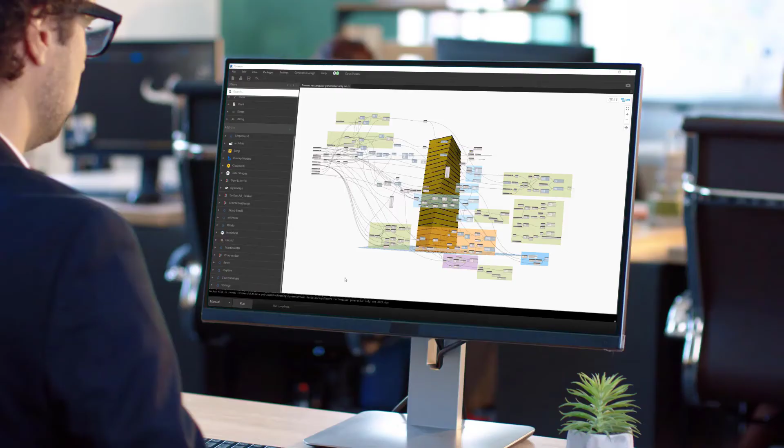The next video is an introduction to this presentation, and hopefully it will give you an insight into our capabilities, future development of BIM management platforms, and new perspectives on construction automation, and a glimpse of possible services in Industry 4.0. Utilizing artificial intelligence algorithms, BEXEL Manager allows you to comprehensively analyze dozens of what-if scenarios.

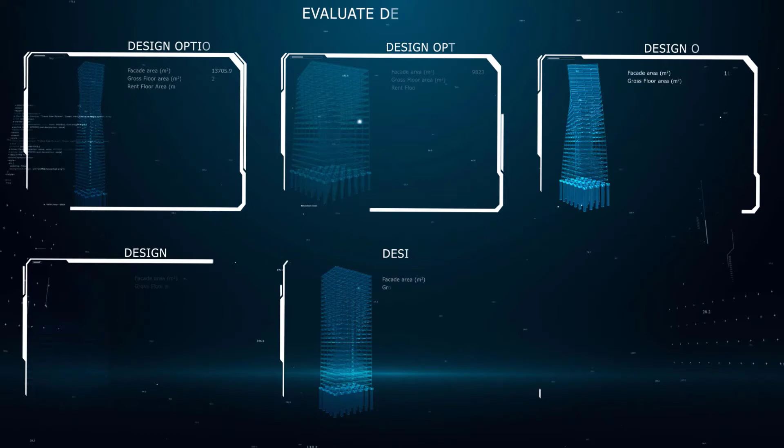Engineers can now study multiple design alternatives in real time, having more freedom for innovation, optimization and higher quality. In synergy with parametric design tools, BEXEL Manager brings the next generation of data-driven decision-making. Our advanced workflow employs smart technology and applies captured experts' logic to generate construction schedules, project budgets, cash flows and resource requirements for each of your preferred solutions.

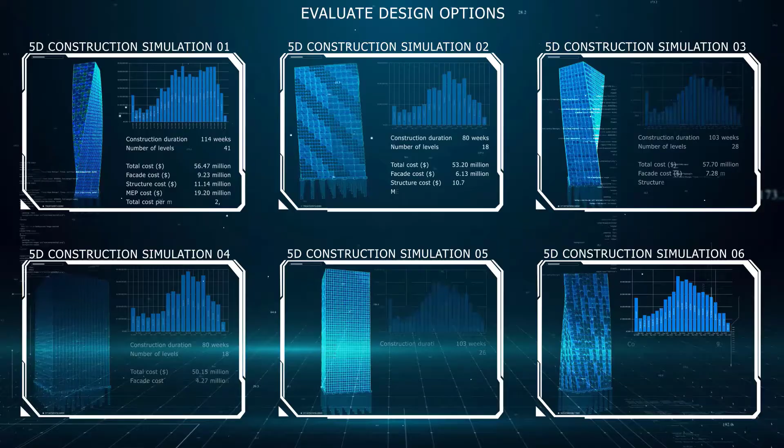This way you can estimate project key design indicators together with required delivery time, cost and cash flow, and choose the best option.

As you may see, the automotive industry already uses parametric design for designing new parts, which are more reliable, economical, more durable, and more efficient, and practically entire industrial design uses it. The plane industry also uses it for designing specific elements such as wings, plane body, and so on. And the boat industry, sport equipment, shoe industry, furniture industry, and even toy industry use it. All have great benefits and have already embraced the potential of parametric and generative design.

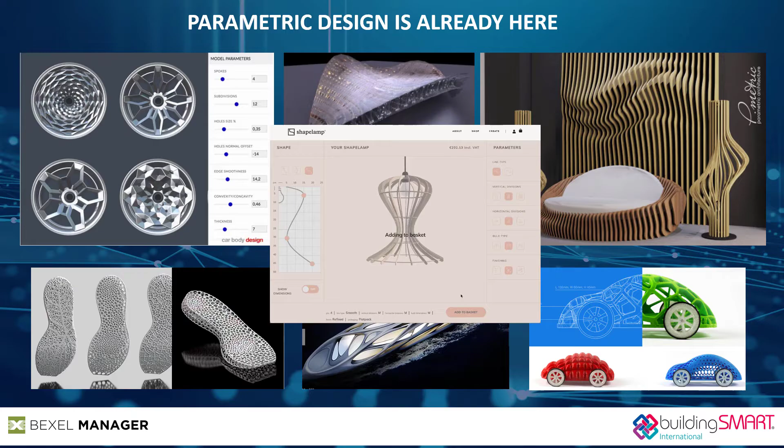In short, parametric design is an interactive process that allows you to create designs based on input parameters. The parameters could be quite simple, such as basic dimensions of the building like length, width, height, or more comprehensive such as site constraints, site density, open space, people circulation, or environmental issues such as daylight, acoustics, people density, or similar. This allows engineers to make design changes in real time, since the software updates the model automatically. So this new approach allows you to explore many more options before deciding on the final design.

Generative design could in a way be considered an extension of parametric design since it relies on defined input parameters. But instead of just creating the output in one iteration, it combines predefined parametric design input parameters, computer power, and also artificial intelligence to find the best solution in multiple iterations.

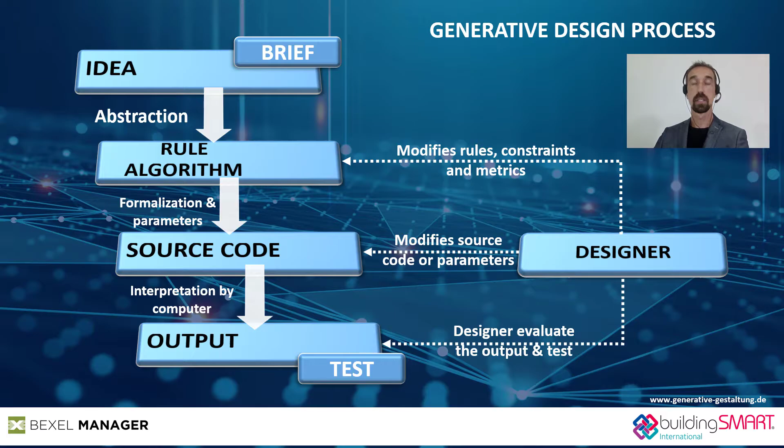Firstly, designers need to set constraints and goals in a very clear and proper way to make the entire process successful. They also need to provide metrics to rank each result.

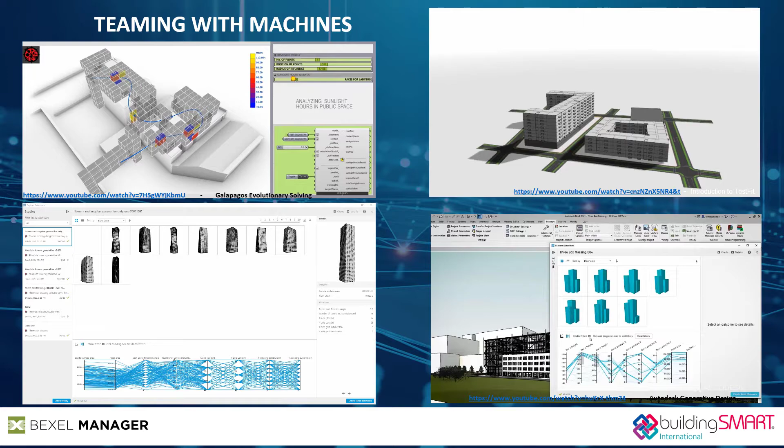In the following slide, you may see that in the last few years there has been huge improvement and a growing number of parametric and generative design platforms, which are used or specifically made to facilitate and improve construction and urban planning design. The entire process of generative design is iterative and uses advanced algorithms.

When the software delivers results, it uses previously provided evaluation metrics and ranks all results. Depending on the solution and artificial intelligence algorithms, it starts by rejecting the low score solutions, and after that creates another set of solutions based on the features with the highest score.

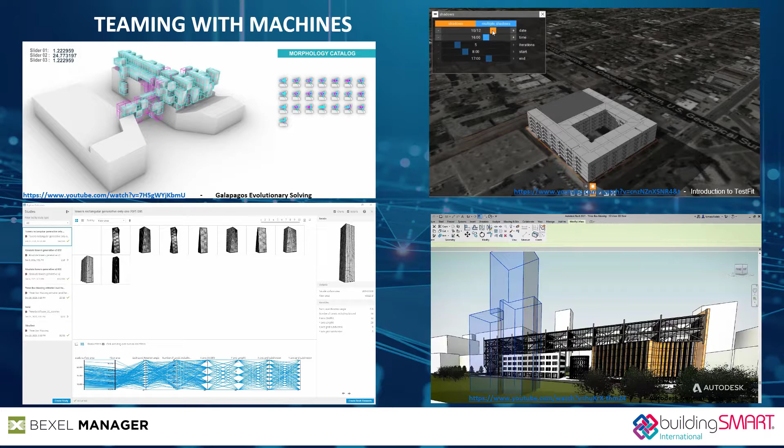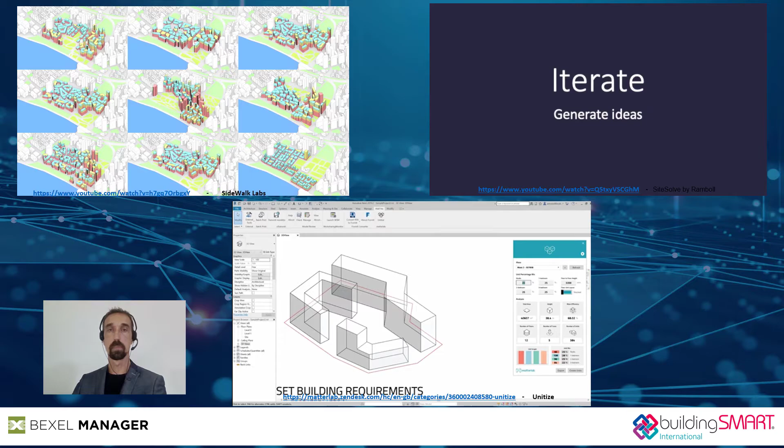This approach allows designers to test hundreds or thousands of options and find the optimal solution based on predefined scoring metrics. Engineers now can set parameters and result metrics, and the computer will do the rest of the job. This gives us more freedom for innovation and optimization, and similarly to how software engineers run code for a try and catch exercise, designers can now test numerous solutions until they find the optimal design result.

The same process can be applied to design low-scale environments such as buildings, but it can also be used for large-scale projects such as city quarters or even entire cities.

We believe that the perfect combination in the everyday construction industry would be a mix of generative design results and comprehensive BIM analysis for cost and scheduling that can be achieved even now using BEXEL Manager Intelligent Schedule Engine and a combination of different generative design tools.

Using a synergy of these platforms, managers, designers, and clients can analyze and study multiple instances of construction simulations along with the respective cost, resources, and quantity data. The automation of quality control increases accuracy, and automation of repetitive and time-consuming tasks increases overall productivity and unleashes creativity and space for even more innovation.

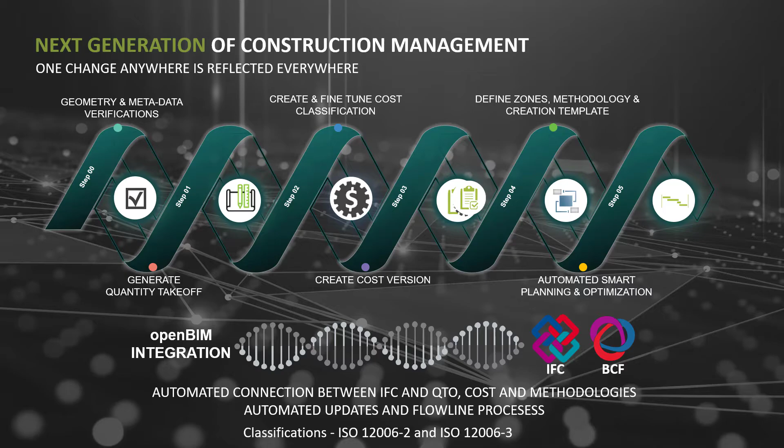Firstly, we can verify BIM data using simple or advanced quality control tools. The following steps are quantification, BIM-based creating cost database, and then a calculation of cost estimation. Lastly, we define spatial and constructional dependencies using our zone and methodology editor tools for schedules. The system then intelligently uses BIM data or BIM model elements and mixes zone and schedule relations and dependencies to automatically generate entire construction schedules and 5D construction simulations.

So resulted schedules are evaluated with the respective resource and cost data, and then the process is repeated for multiple generative design results. In the end, we can compare and analyze different 5D outputs for different design results and select the best one. Now I will present you a part of the script which is used for generative design in this case study.

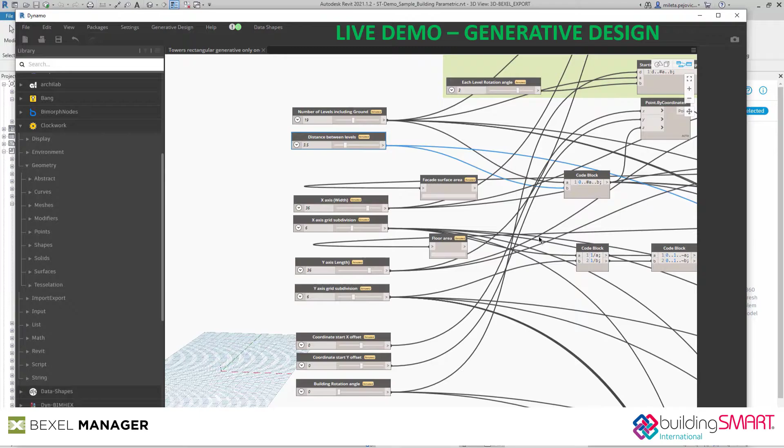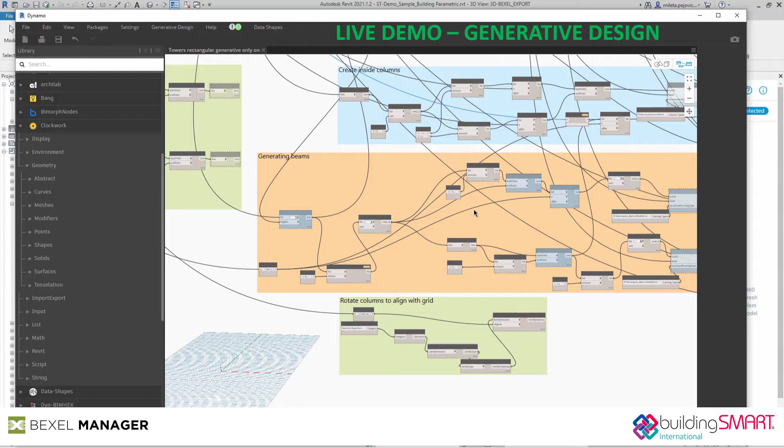As you may see, the Dynamo script is quite comprehensive and is based on basic parameters such as length, width, grid, level height, and number of the levels, as well as rotation of the stories and building on the site and rotation of each story. Based on that, we can automatically generate our building.

What is really important here is that we want to analyze gross floor area and facade surface area for each result. These are actually resulting metrics that will be used for comparison of multiple solutions.

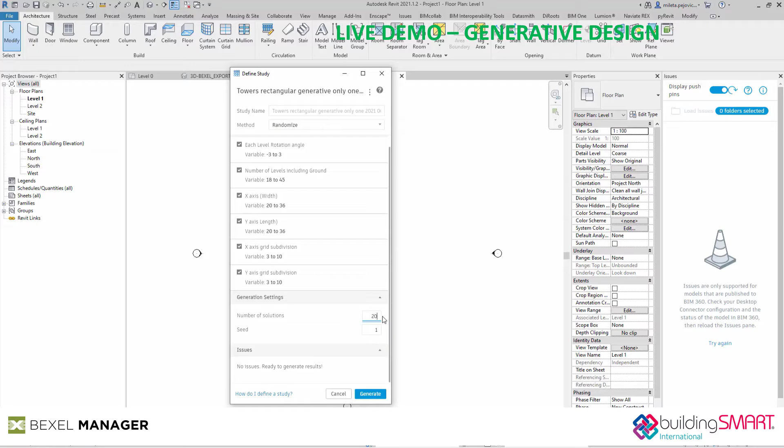Instead of repeating the process and changing input parameters hundreds of times, I will set a range for input parameters and run the engine for generative design. The system will run the script, or run multiple scripts with a variation of the input parameters. The system is processing the data and sorting it so we can go through multiple variations.

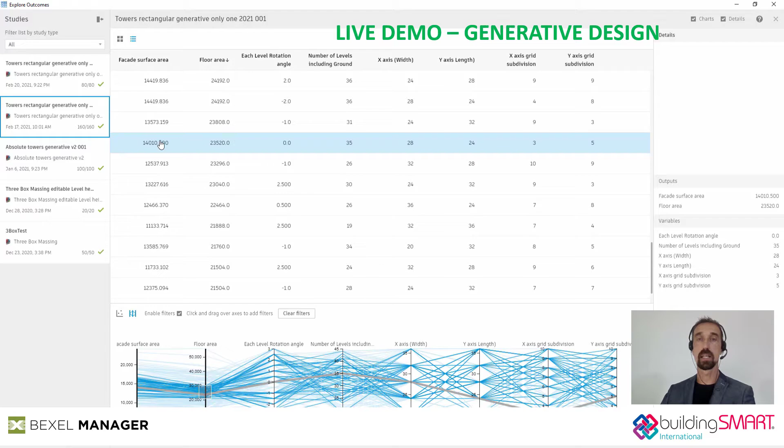The results are listed and the engine is placing all different outcomes into space. After completion, we have a variety of solution options that are different from one another, and now we can analyze specific outcome results, or we can even filter or sort all these results based on specific outcome results that we specified at the beginning as a metric.

In our case, I filtered results within the range of 20,000 up to 25,000 square meters of gross area, so we can decide which solution is best, or let's say more suitable for our case.

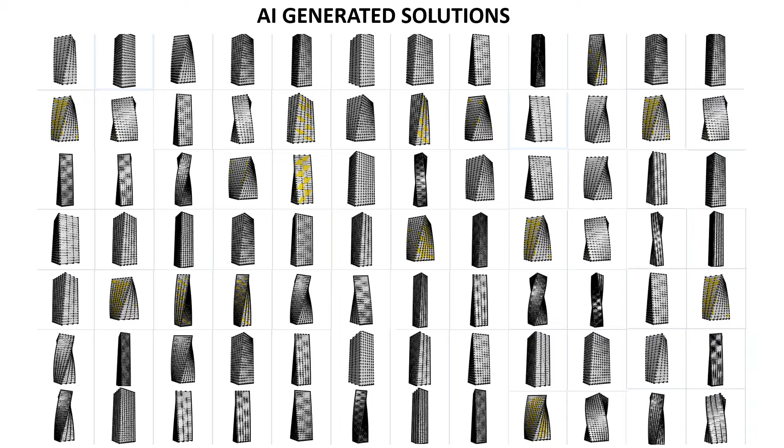Now, when the generative design platform is completed, from almost 200 different outcomes using the filtering option, we decided to select only 6 different results with the relatively similar gross floor area, in a range between 22 and 23,000 square meters.

Now, when we have the first set of building solutions, I'll explain the process of cost estimation and generation of different versions of 5D construction simulations using these results and our advanced scheduling engine within the BEXEL manager.

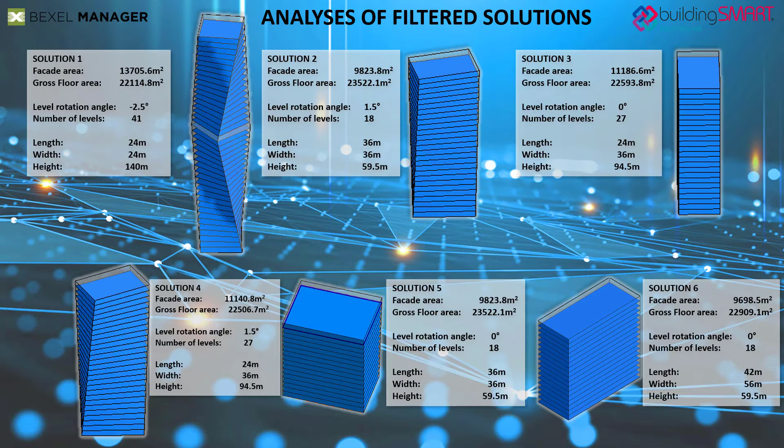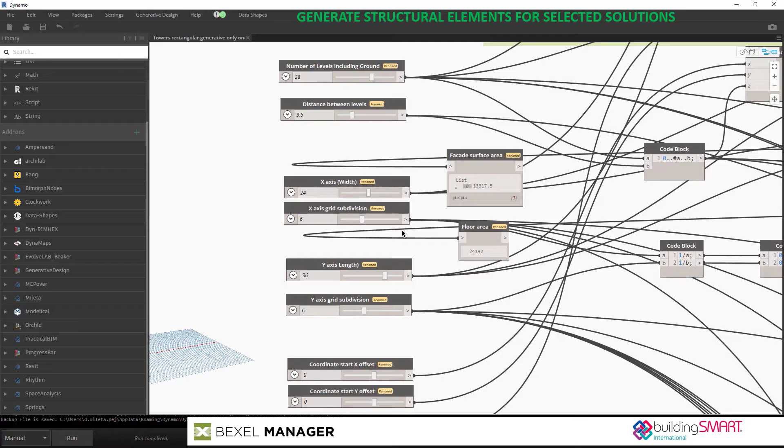I would like to point out that we could use just these created masses for the entire cost and time estimation, but in order to test the solution even further or make them more believable, even though it's just conceptual stage of the project, we'll use the same script which I presented previously to generate structural elements and apply more detailed construction systems and analysis in more detailed level for cost estimation and variations.

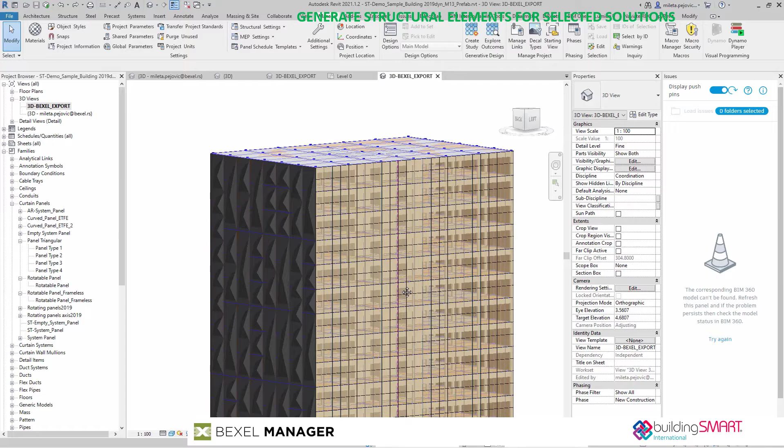The script will instantly generate main predefined structural elements such as foundations, slabs, beams, walls and columns, and even basic architectural elements for facade and spaces.

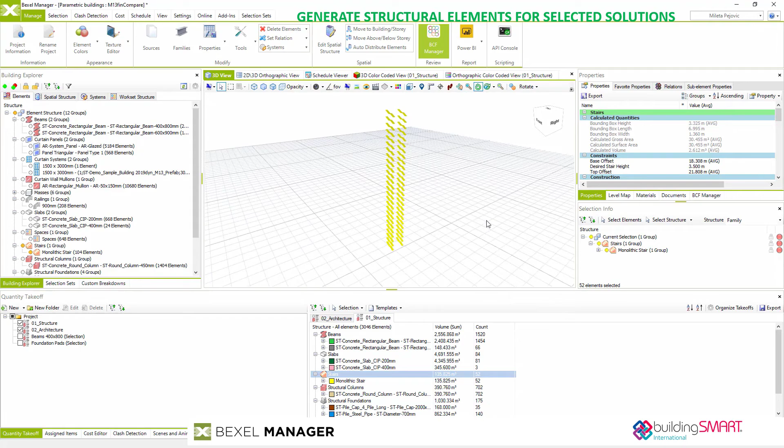These spaces are just simple rooms for the entire story, or in some cases 2 or 3 generated simple rooms covering the entire area of one level.

But these results can be very quickly reviewed using quantity takeoff analysis, where custom breakdown structures are also generated based on the IFC building types.

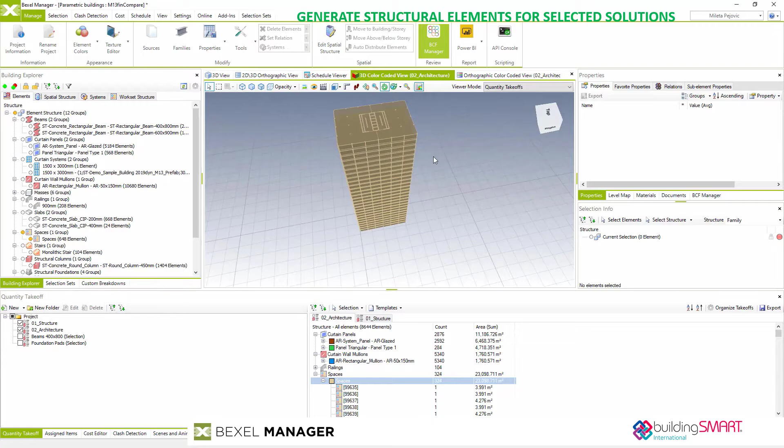Previously mentioned spaces, or to be more precise, placeholders for the rooms, are also quantified and then will be used for cost estimation of, for example, MEP works and finishing architectural works using the square foot calculation method. Since in this stage of design, engineers usually work with a very simplified model, the areas are really important, and these rooms can be used instead of MEP elements for further design stages.

The quantity takeoff results are exported, and the same can be then used for further comparisons or the creation of BIM-based cost databases.

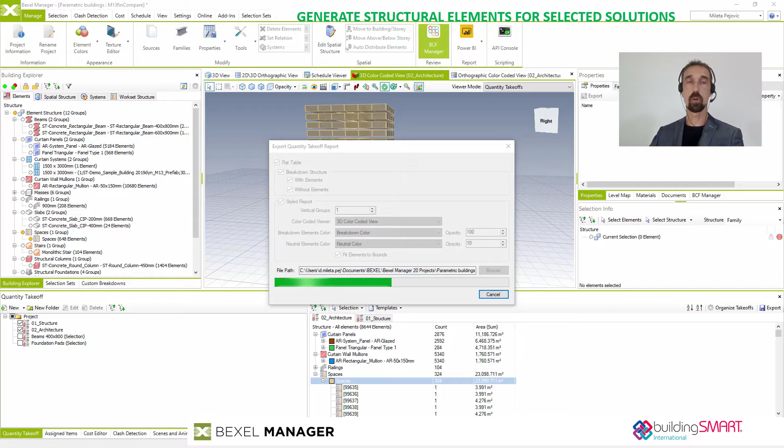These multiple building options and results of quantity takeoff calculations are a great source of timely information and insight on the first drafts of structural and architectural design. Using the outcomes, it's very easy for all participants in the project to identify valuable information and to provide feedback to design teams for additional modification or optimizations.

Using these very quick QTO analysis and exports, engineers have full knowledge not just about the shape and the static of a proposed solution, but also measurable differences and a clear picture about the possible impact of each design option on the final cost. More about that topic will be covered a little bit later.

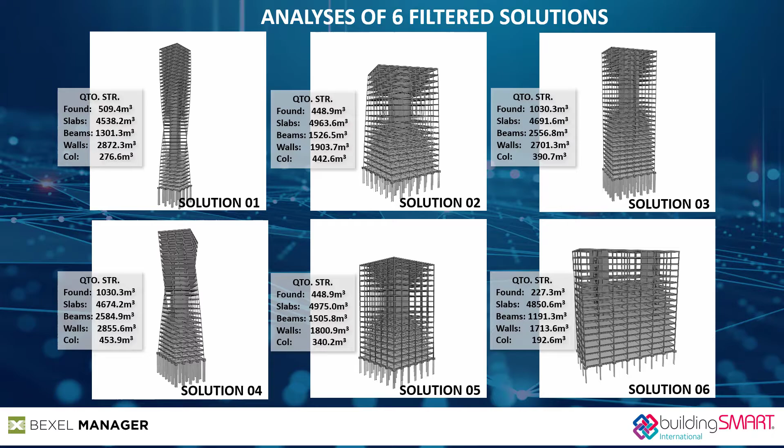Using visually presented results, which can be exported in Excel spreadsheets or Power BI templates, the manager and clients can identify pros and cons for each of the generated solutions, number of levels, gross floor areas, facade areas of each design option, and of course quantities of main structural elements.

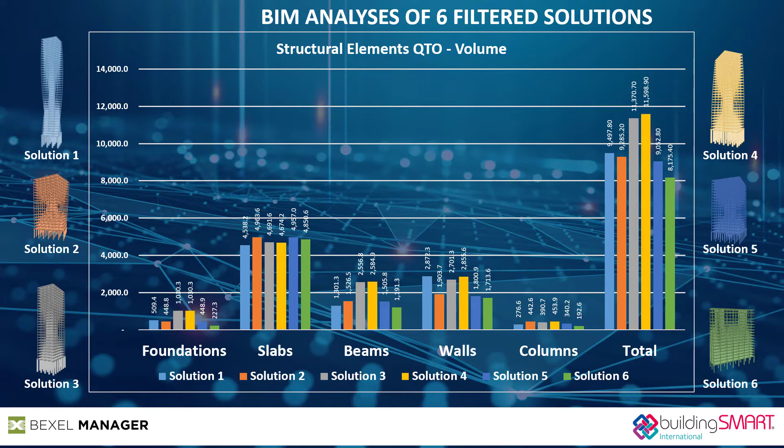I remind you that we still talk about almost instant analysis and comparisons of 6 different design solutions almost in real time. One of the greatest benefits of BIM, which represents a single source of truth or one centralized information database connected to model geometry, is that we can easily extract the information, analyze it, and organize it in other ways according to our needs or specific requirements for the project.

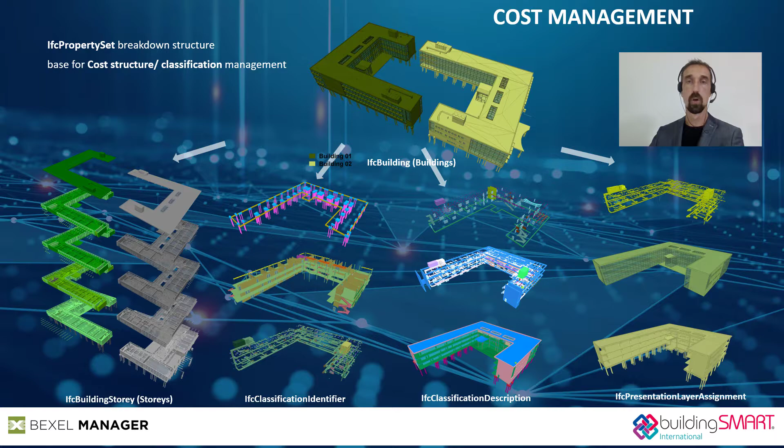Our platform uses all existing BIM data, and in this case, for example, IFC property sets, to segregate BIM elements into cost breakdown structures or into elements which can be used for cost breakdown structures.

This slide on a high level explains the process of using BIM data to create cost databases and calculate cost estimation of your projects. Using the existing model and respective BIM data, we can automatically organize elements according to any property or its values and use the structure as a base for a future cost database.

Once the cost breakdown structure is created, users then can specify and define additional information for the cost database, such as unit price, resources, or calculation formulas.

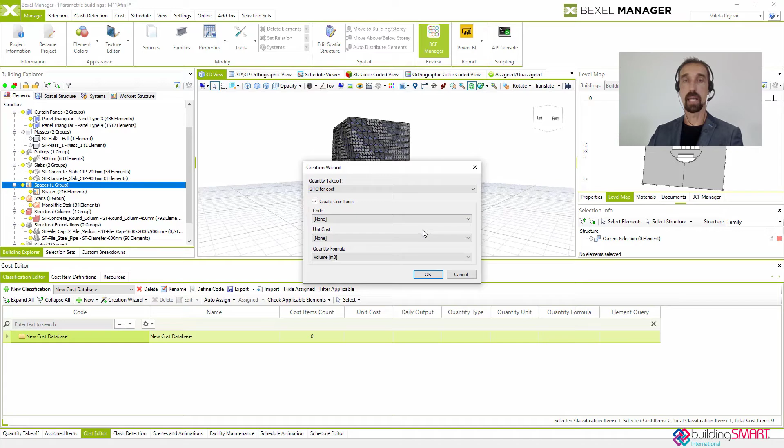I will demonstrate the same process in a live demo using one of the previously filtered design results. We can use the existing quantity takeoff structure to create our cost structure. Using different IFC building elements, for example, the system creates cost items that already have a defined linking rule with model elements for later cost and quantification calculation.

The fastest way to edit the cost database and create additional cost items for calculating the price of elements which are not existing in a BIM model in early stages of design, such as formworks, reinforcement, MEP systems, or even interior design elements and architectural finishing layers, is by editing this in Excel files.

In the exported file, we'll use the data of existing elements, for example concrete beams and slabs, to create cost items for reinforcement and formworks, using custom formulas to accurately calculate their price.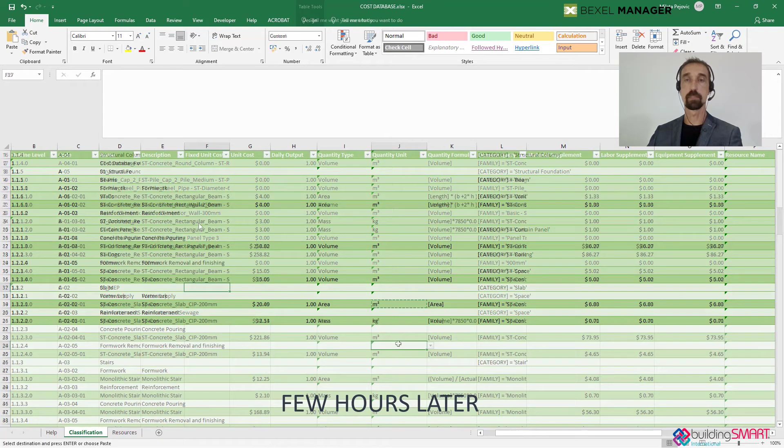For the rest of the cost items, which are mainly related to MEP and also don't exist in this model in these early stages, we'll use existing spaces or rooms in the model and make cost items that will calculate the price based on the areas of existing spaces using the square meter method.

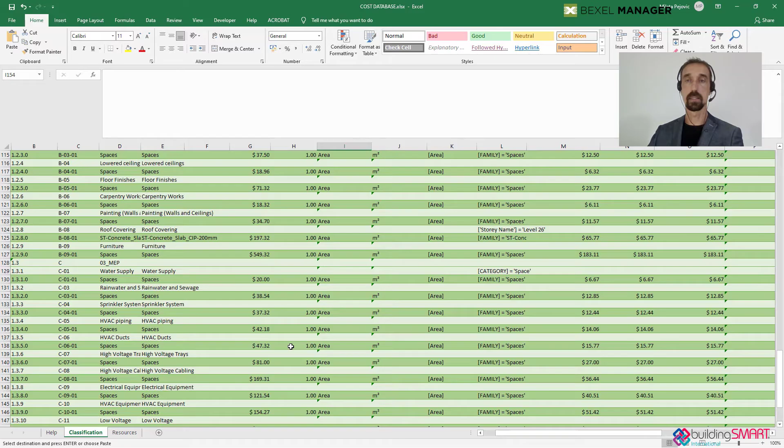Once we enter the unit price and the entire database is defined, we can then import back this Excel cost database and use it for cost estimation within the BEXEL manager, and apply the cost estimation engine for auto-linking BIM elements and cost data to automatically calculate the cost version.

As you may see, the entire cost version is created and all the prices are calculated automatically, including reinforcement or price for anticipated MEP works.

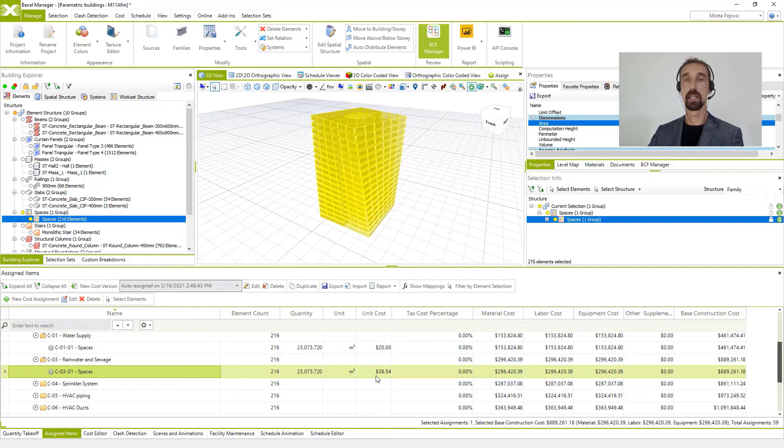Even though we didn't have these elements modeled in the BIM model, we used existing room elements to calculate the entire cost version, including MEP, and calculate the entire cost version for the project.

The great thing here is that the existing cost database can be reused to calculate the price of other versions of the same building, since they were all generated using the same template file and the same script.

So once the cost database is defined, we can use the same cost database for our scheduling engine to generate a schedule and multiple versions of a schedule to test our construction simulations for the project.

The important thing here is to interpret the scheduling logic of the planners which they're using for methodology, and this will be achieved using our methodology tool and then applying it. I'm not going to explain everything in detail, but if you're not familiar with our platform, the core of our engine is the ability to intelligently interpret predefined schedule hierarchy, structure, relations, and schedule sequencing in the form of methodologies.

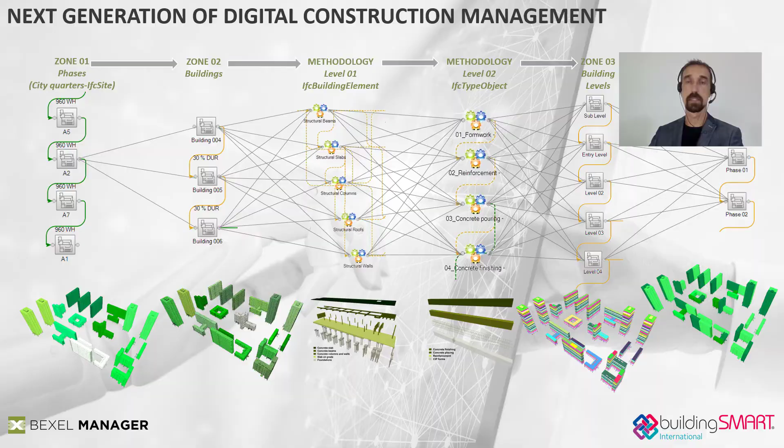The system then combines methodologies with spatial information from a model defined within zones, and almost instantly creates thousands of tasks following that predefined logic, relations, and dependencies between schedule items. On the same project example which we previously showed, using the scheduling engine, we specify sequencing and dependencies of schedule items using the methodology tool.

These planning methodology item relations can be defined in multiple hierarchy levels. As you may see, all methodology items are linked to respective cost items from the created cost database, and on the other hand, using the zoning tool, we specify spatial sequencing and teach the system how the methodology items will be spread out through our levels and building zones.

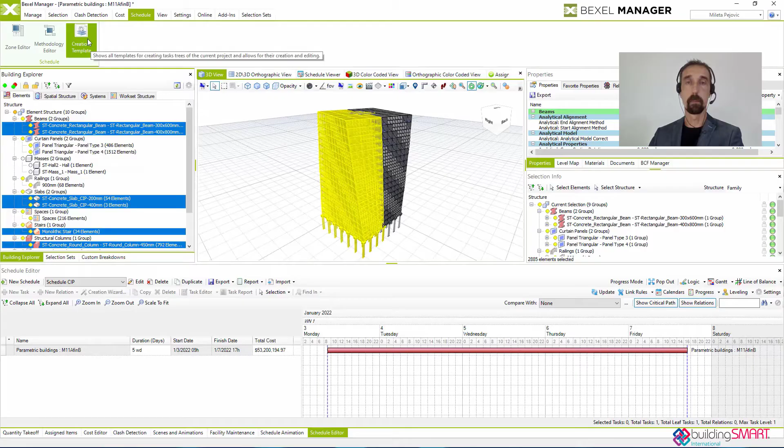Now, mixing zones and methodologies, we can create multiple schedule creation templates, and these allow us to generate entire schedules in a matter of seconds. All these templates are exchangeable and reusable in other similar projects.

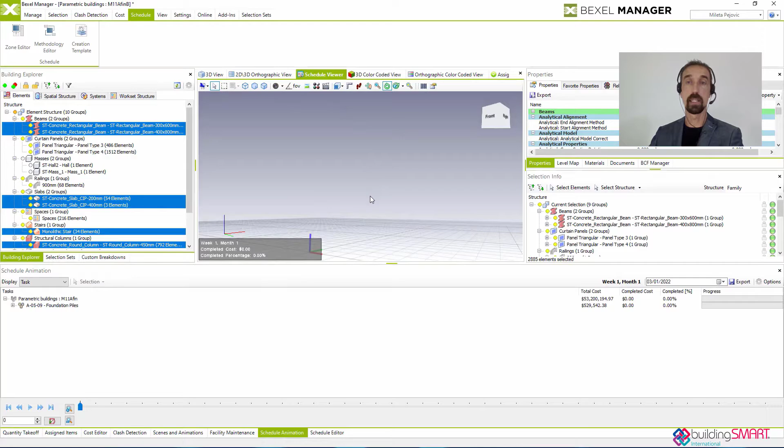And now you may see how the generated 5D simulation looks like, almost instantly. Note that the entire cost is also presented, and all MEP works are executed in the form of execution of specific rooms in our animation.

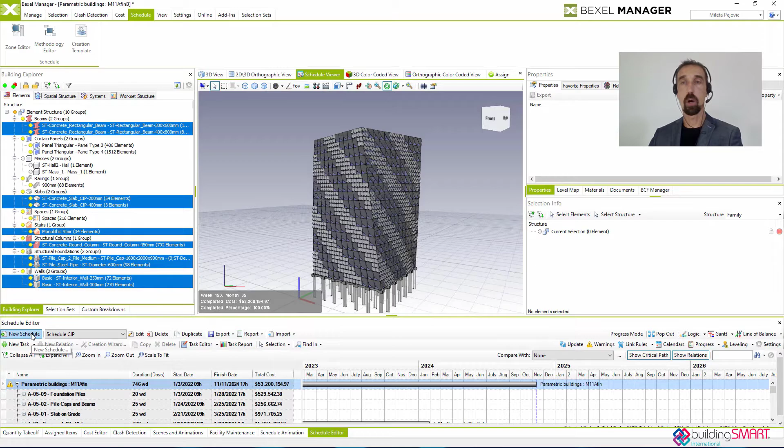Sometimes the first schedule is not ideal, of course, so we can always try different options or try to optimize the existing ones. The hardest part, which is creating all these relations and related tasks, is done by our intelligent engine.

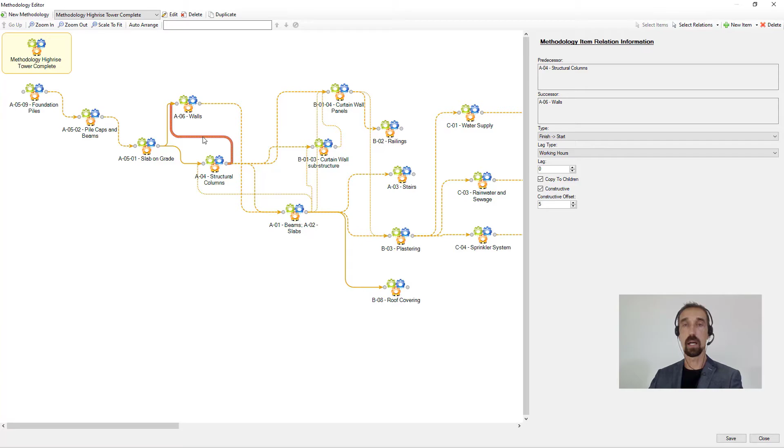In our case, we created another schedule template by defining a different methodology, which is frequently used on high-rise projects, where the execution of the concrete core of the building is the leading activity, and all other activities are more or less dependent on the pace of core execution.

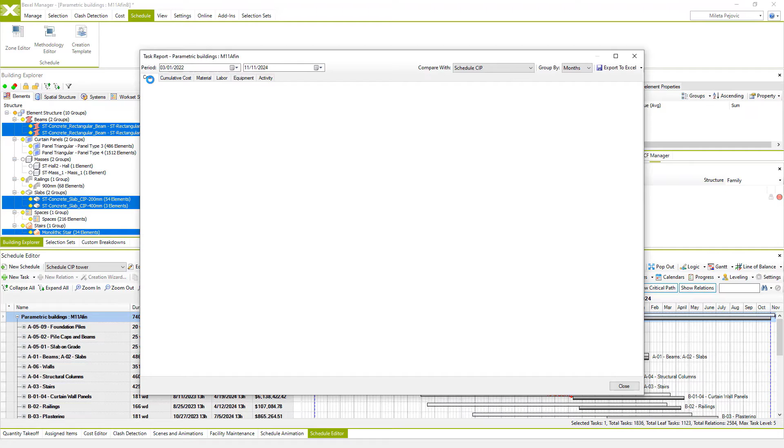So you may see how easy it is to create another version of a schedule and preview the 5D simulation for it. Different versions can be compared and analyzed within the platform itself, or exported into Excel files or Power BI reports for further and more detailed analysis and comparisons with other projects.

Another important benefit is that all created methodologies, schedule templates, and cost databases can be exchanged and reused for different projects, or in our case, for different versions of the building. To present multiple use cases and scenarios, this process again, on a high level, explains what is possible once you use our scheduling engine and create the first schedule.

A generated schedule or schedules can be easily adjusted or optimized, and planners can use and apply multiple calendars on multiple tasks and change the duration of specific tasks or the entire schedule.

Then the common question, when we talk about BIM-based schedules, is: can we add new tasks which are not related sometimes to any model elements, and how will these scheduled tasks be presented in the 5D simulation?

The simple answer to this is yes—of course you can even add additional tasks which are not related to any BIM model element, but you can link them with your cost items and calculate the price for these activities even though they're not related to any BIM model element.

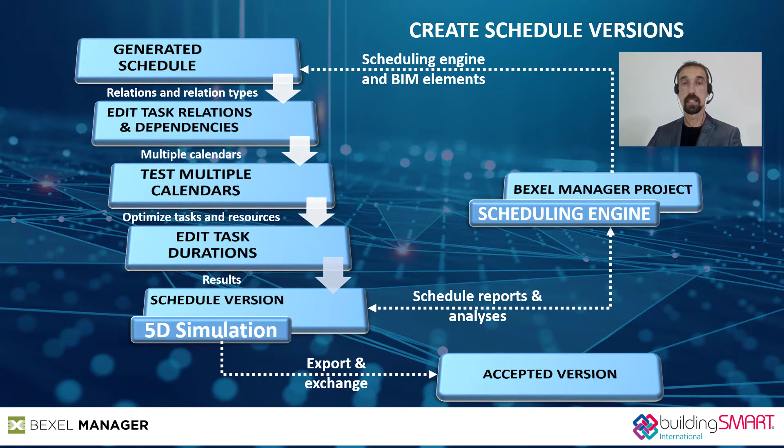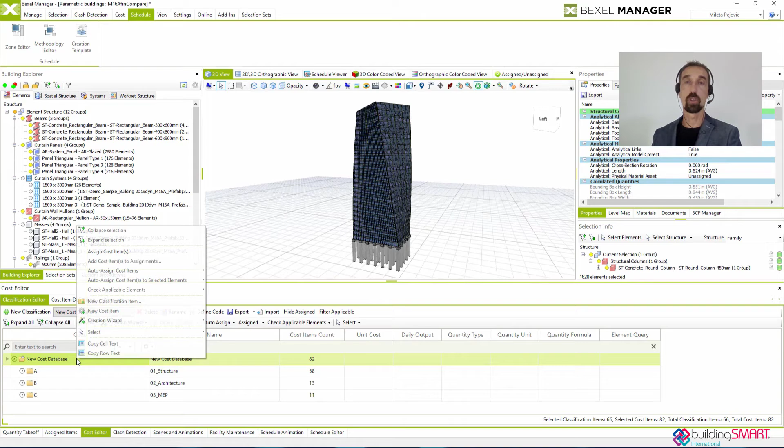The best thing, when it comes to cost estimation of generative design solutions and exploring different construction schedules, is that all previously generated data is exchangeable, and we can simply import our previously defined methodologies, templates, and cost databases.

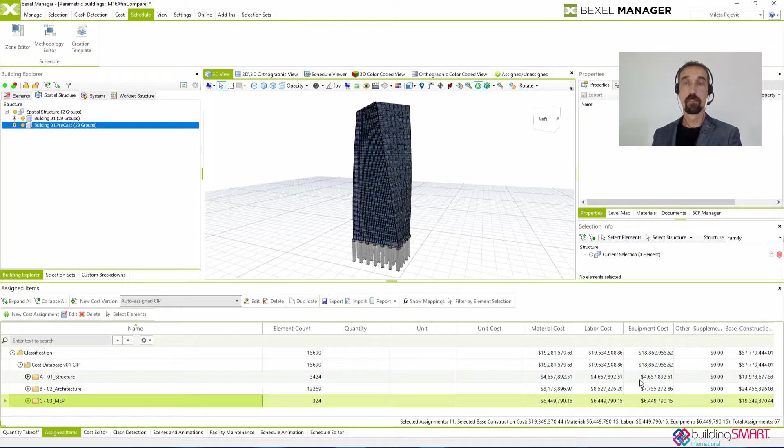Using the auto-assign option, the engine applies previously imported cost items and cost databases, links them with model elements, and calculates the total price. In a matter of minutes, we have a new cost estimation for a totally different building or a totally different new design solution.

Additionally, we can analyze each part of the building price for different disciplines or different building zones. Similarly, as the cost is automatically calculated using our scheduling engine, we can create a new schedule version for this building using imported and predefined construction templates.

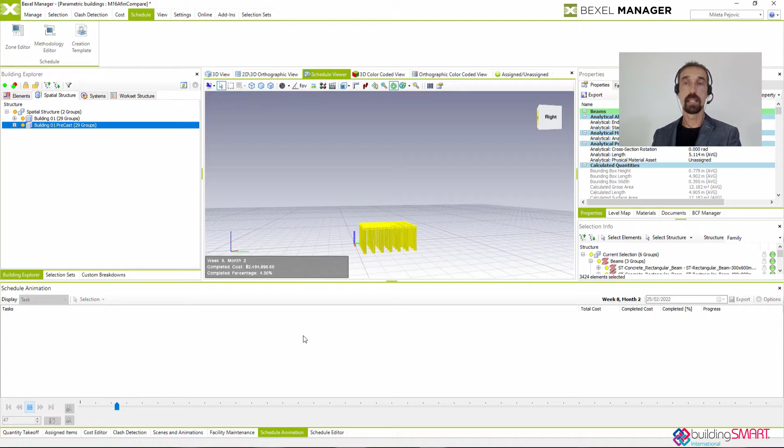So the entire schedule is created with respective links and relations, and now we can preview full 5D simulations. Planners and managers don't have to spend days analyzing quantities and design options in order to create different variations or different versions of schedules for each building, and additionally make construction simulations.

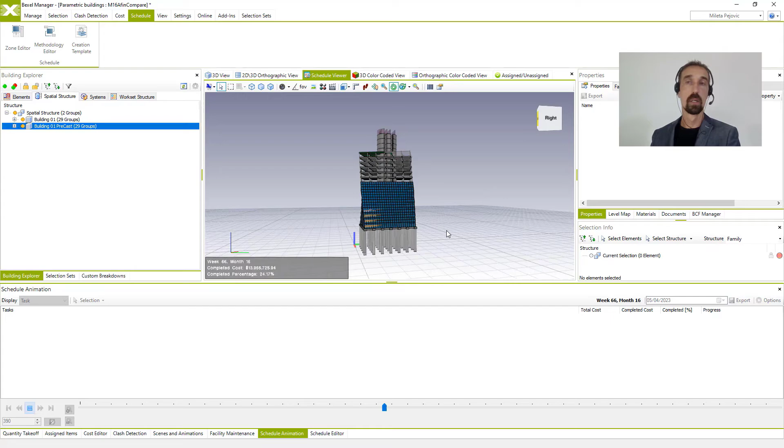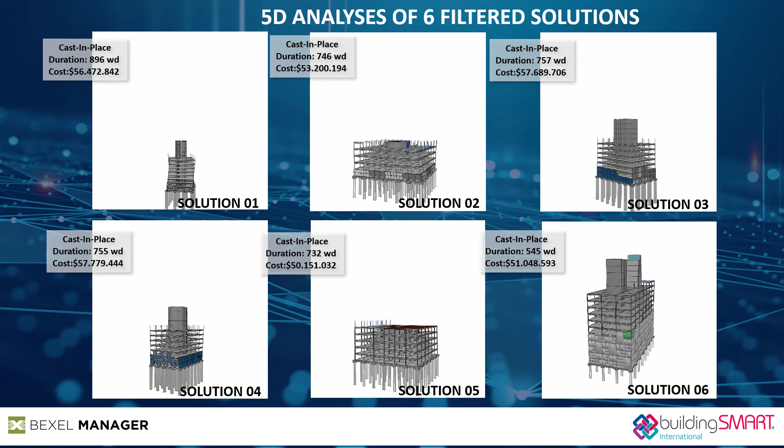We believe that new technologies and new workflows allow us to be more efficient, more productive, and more accurate, using possibilities of integrated BIM platforms where all the data can be easily analyzed, reused, edited, and exchanged. Due to time limitations, I won't repeat the same process for each of our 6 building options, but I will present the outcomes of previous workflows and analysis.

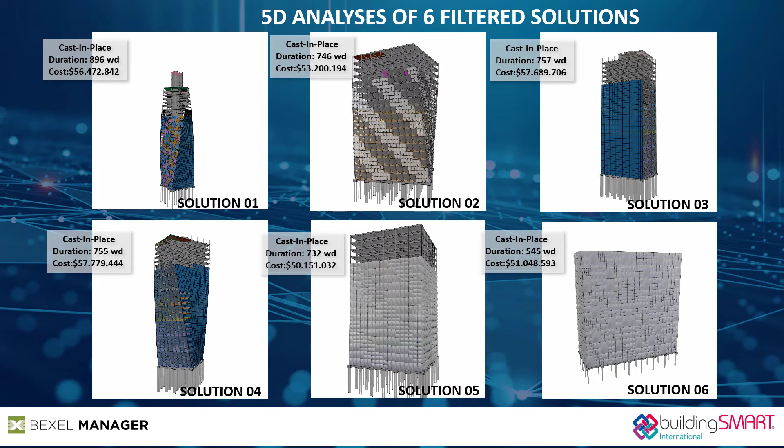After loading cost database and schedule generation templates into each of these projects, once executed, the system creates cost estimation for each solution, based on our predefined calculation formulas and different design options from the model itself. The same predefined planning methodology for cast-in-place construction is applied to all 6 solutions, and you may see the outcome 5D simulations here. Duration of each simulation video corresponds to the real-time execution of that building.

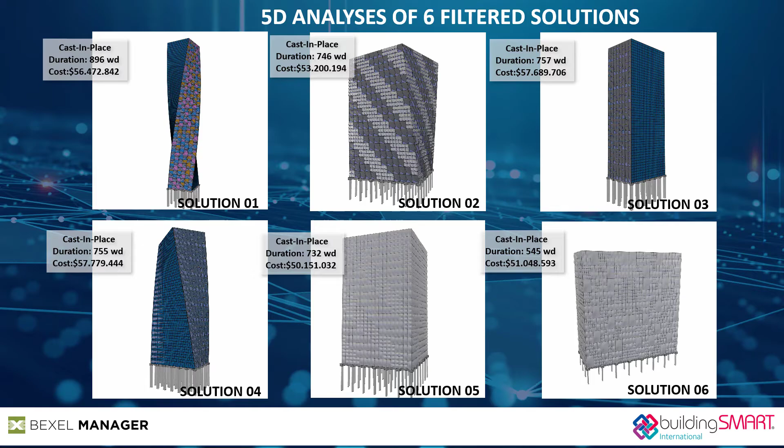Again, in the very early stages of the project, these types of cost and schedule analysis can be extremely valuable for the investors and later on for the project managers as well.

Exported cost and time information in the form of Excel spreadsheets directly from BEXEL Manager platform allow us to easily compare all the options, visualize results, and analyze the pros and cons of each solution.

As expected, the tallest solution will take more time to be executed, but the price of this solution is not what we would expect just from the look of the design itself.

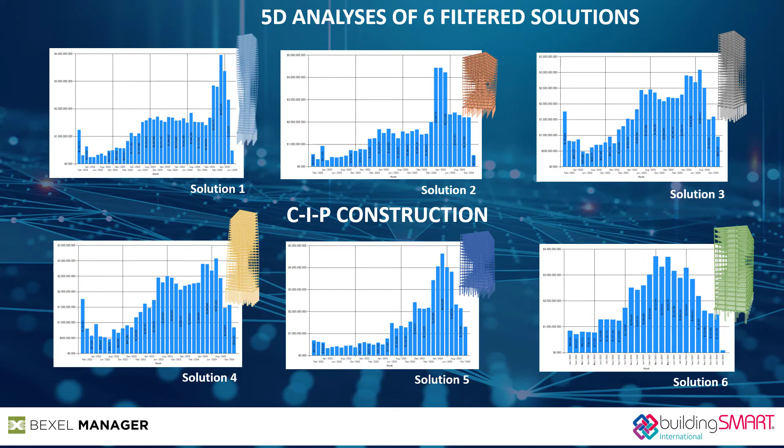Exported cash flow charts can give us some insight on initial expenses, especially important for investors and future project managers, so they can anticipate material procurement, paying salaries, fund new projects, and finance other functions of the company's operations and so on. It's also very interesting to the contractors.

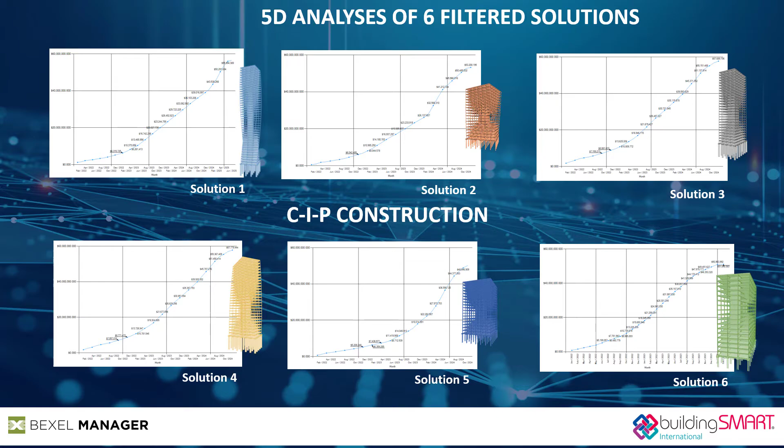They can understand the risks and potential benefits of hiring subcontractors on the project and in which phase of the project they would hire the subcontractors.

In this case study, even though the price of solutions 3 and 4 are not the most economical, we decided that their layout and height comply with the site regulations, and that the design of these 2 options is very interesting compared to previous design options. So we'll continue to explore some additional design or optimization options even further for these 2 options.

And the first thing which comes to mind is to try with a prefabricated type of construction, at least for structural elements, and explore results.

Again, since the entire building is generated using parametric design, just by editing the script, we can create and update the model presenting prefabricated structural elements.

Created versions are loaded into our platform, and since the model is still at a very low level of detail, you can see that the only difference in structural elements is the subdivision of structural slabs into prefabricated elements.

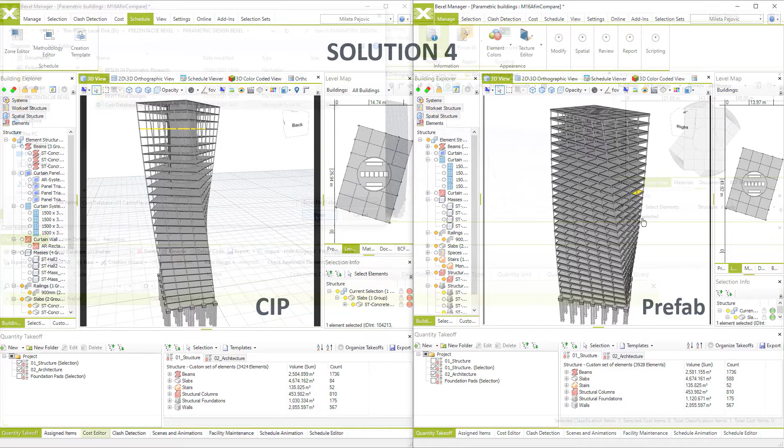In this iteration, all quantities are the same in both versions, cast-in-place and prefabricated. Only the number of slab elements is increased due to the subdivision. However, the cost items for prefabricated elements and the price of installing them is different.

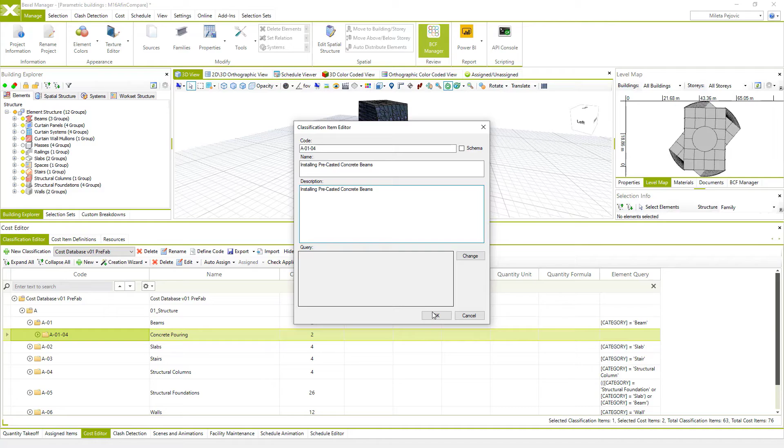So the easiest way to create a new cost database for prefabricated elements is by editing the existing one for traditional cast-in-place construction, and instead of existing cost items for formwork, reinforcement, and concrete pouring, we'll specify new ones, delete the previous, and define cost items for installing the respective structural elements.

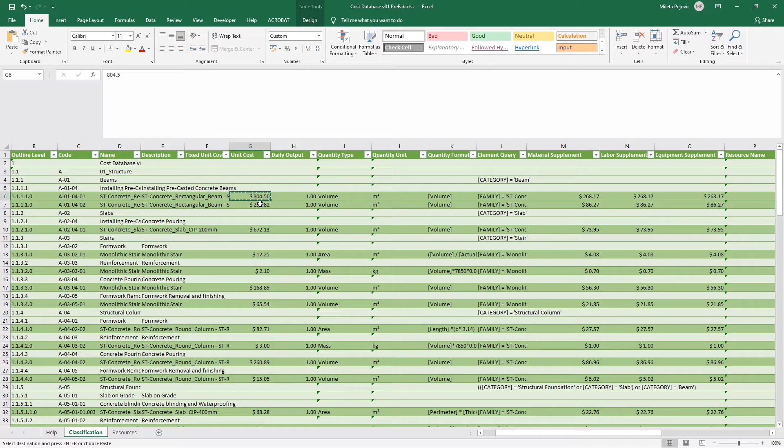The same process can be done in Excel sheets as well, and Excel files can be easily exchanged also. After providing the unit price and calculation method, the cost database can be loaded again, and the system will automatically calculate the price using the already explained auto-assign engine.

Once the price is calculated, users can explore the price of selected elements and compare price differences when the element is executed as cast-in-place versus when the elements are installed as prefabricated elements.

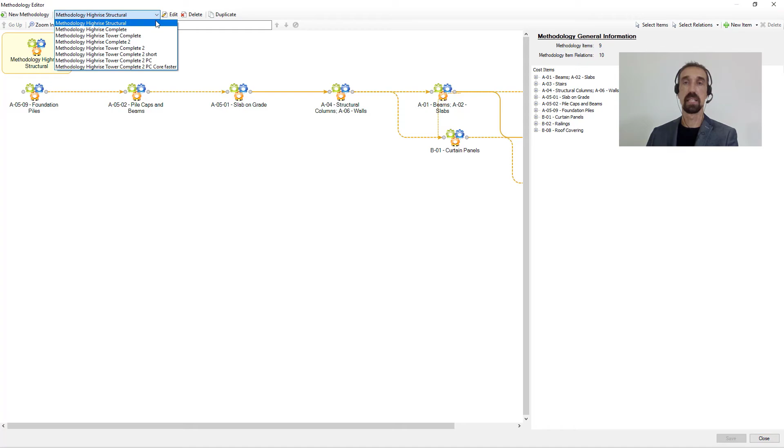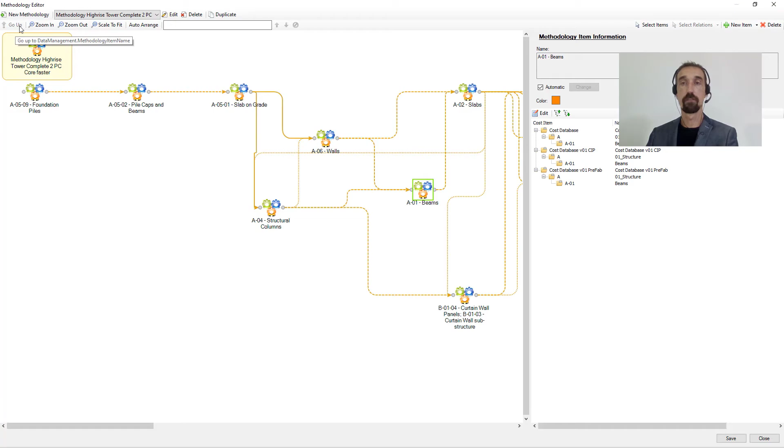The next step, in order to explore a prefabricated method of construction, we need to adjust the existing schedule methodology used for cast-in-place and modify it for prefabricated sequencing. In this early stage of a project, the main difference between prefabricated and cast-in-place scheduling method is that prefabricated scheduling methodology doesn't have a second level of methodology where formwork, reinforcement, and concrete pouring are defined. So instead, we'll use only the first level of methodology with minor changes of dependencies between methodology items.

Once the predefined creation template for schedule is executed, the entire schedule for prefabricated construction is generated. The same can be reviewed as a 5D simulation, and all respective schedule reports can be accessed and reviewed, or even compared with the cast-in-place scheduling options. Of course, all schedule reports can be exported into Excel sheets for further analysis.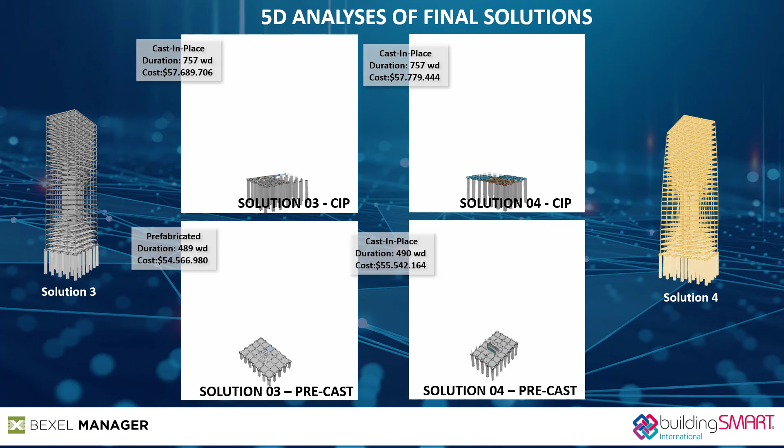Created 5D simulations can be exported and outcome results can be analyzed side by side so decision makers can have all necessary insights and information needed to make the right call.

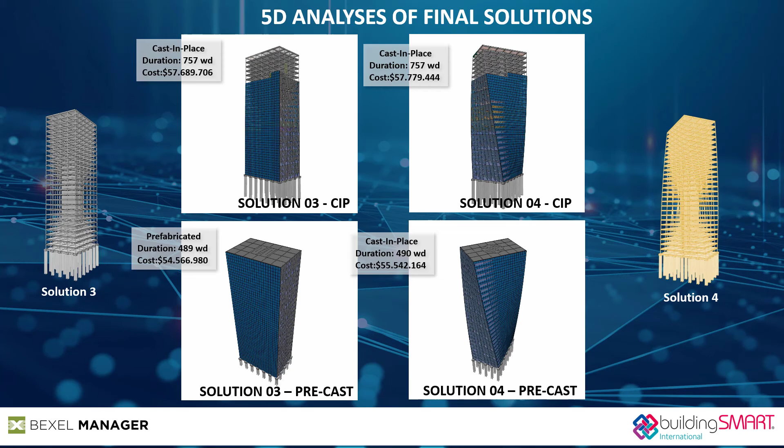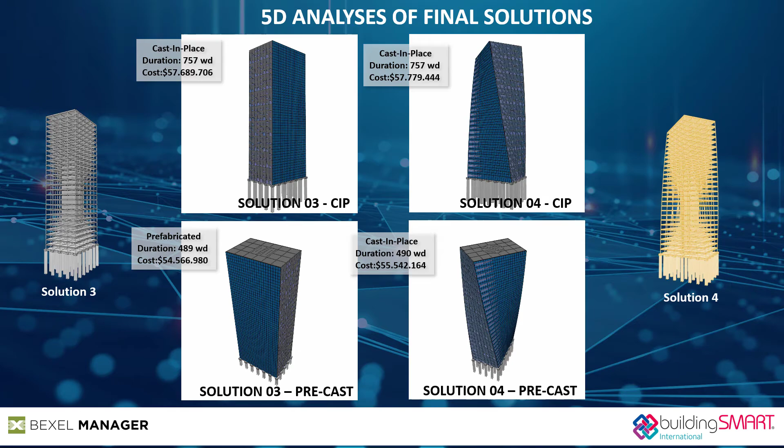As you may see, just small adjustments in a model have a significant impact on the total price of the final solution. Duration of the prefabricated schedule is also shorter, and even though the quantity of structural elements is the same, the number of activities is smaller and the time needed to install prefabricated elements on site is notably shorter. All charts and reports are instantly generated and exported, and using these results for comparisons, it's clear that the prefabricated construction method is the preferable one for this project, at least.

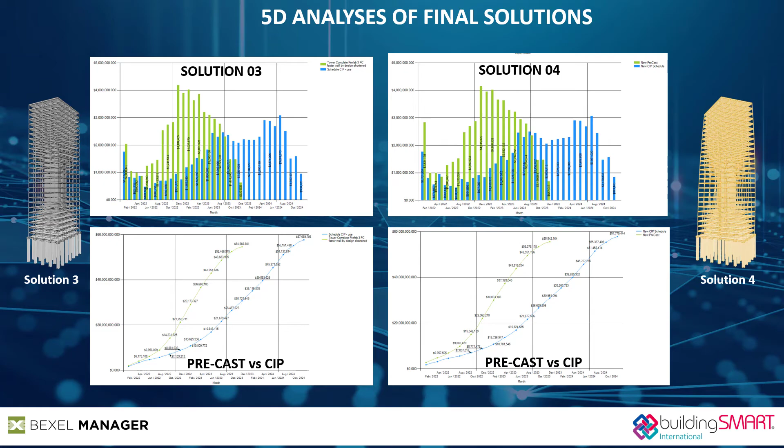So the price of structural elements is around 20% decreased and schedule duration is almost 30% shorter as well. From the presented results it's quite obvious that this exercise of testing prefabricated construction gave some results, and now the price of the solution is comparable to other previously explored solutions which were cheaper in the first place.

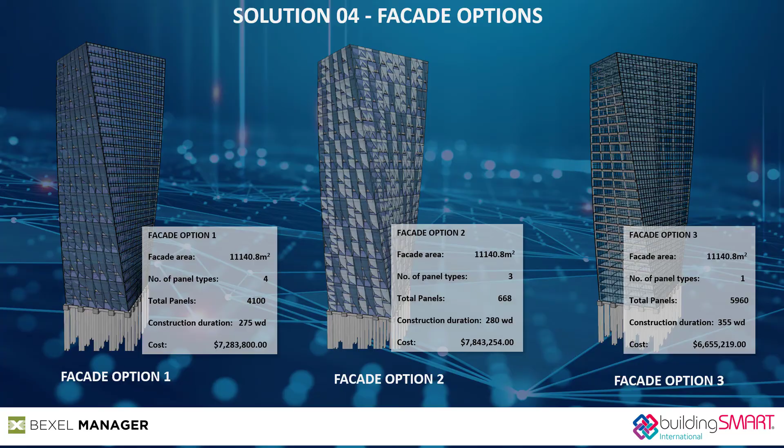Now we can go even further and try to test additional optimization such as facade change. Initially, the facade for the entire building is generated using a parametric algorithm for creating randomized facade subdivision patterns using predefined panels.

Initially, we used 4 different panels, but if we want to test other scenarios using the same script, we can generate a simpler version using, for example, only 3 different panels, or even just one panel to create a common curtain wall facade as the third option.

Just by changing facade patterns and panels, the facade area stays unchanged, but the number of panels, their price, and materials are changed, and these changes can be easily tested for further implications on cost and schedule.

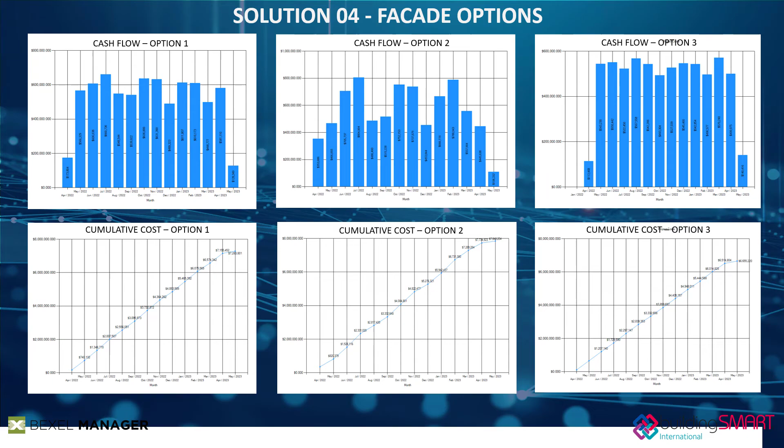So going through all options, you can confirm the accuracy of the data and explore the impact of these results on cash flow, for example. The simplest option is also the most cost-effective.

So these already executed tests are just an example of how easy and valuable it is to use the latest technology, parametric design, and integrated management platforms.

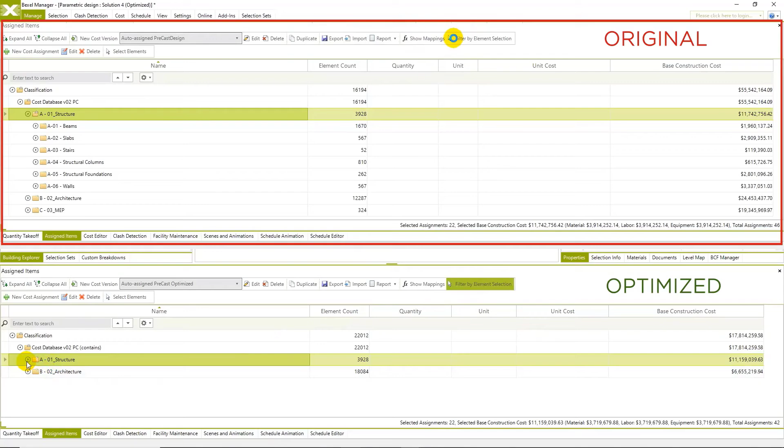On top of the previously performed analysis, we can even test another final option, which is optimizing prefabricated structural elements and trying to decrease the size of slabs and beams, for example.

So the newly generated solution using predefined parametric algorithms is updated, and our project in BEXEL Manager is also updated, so we can see another change in the total cost of the project.

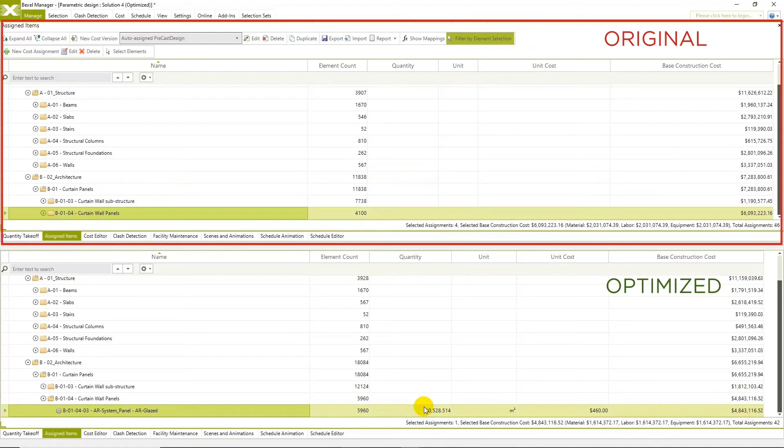The system recognizes changed elements since we only changed their size, but the original global unique ID for each element is unchanged, and respectively the schedule is updated, so we can instantly review 5D simulations.

In the end, when we tested multiple design versions for what-if scenarios and decided on the final solution, investors can also test various scenarios which are extremely valuable when it comes to planning investments and tendering contractors and main contractors as well.

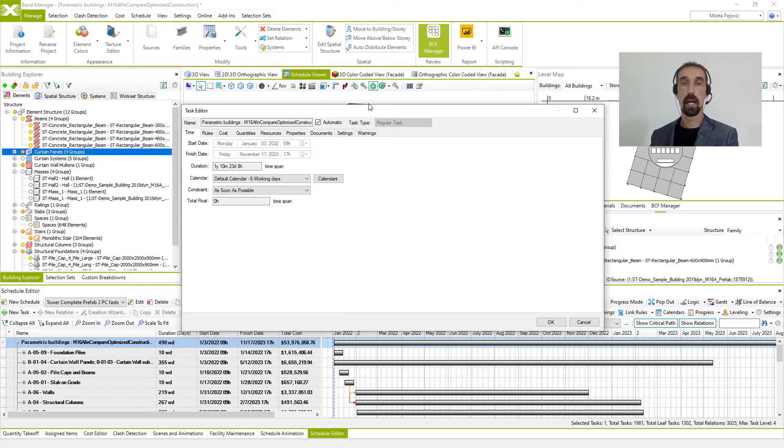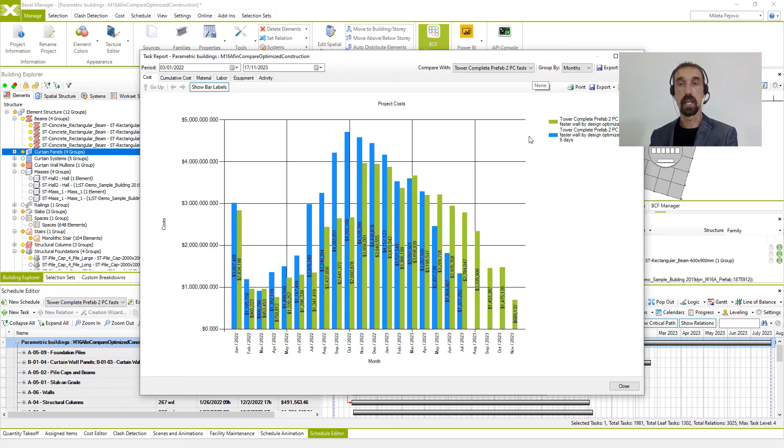So we can easily test the final solution and final schedule in case the working week is, for example, 5 days, versus when the working week is 6 days. So by simply switching the calendars, the entire cash flow is changed.

The results can be compared with previous design options or previous schedule versions as well. By exploring multiple options, we're just trying to find the best solution for a specific project. But in the end, this is just the beginning of the next stage of the project and project design development.

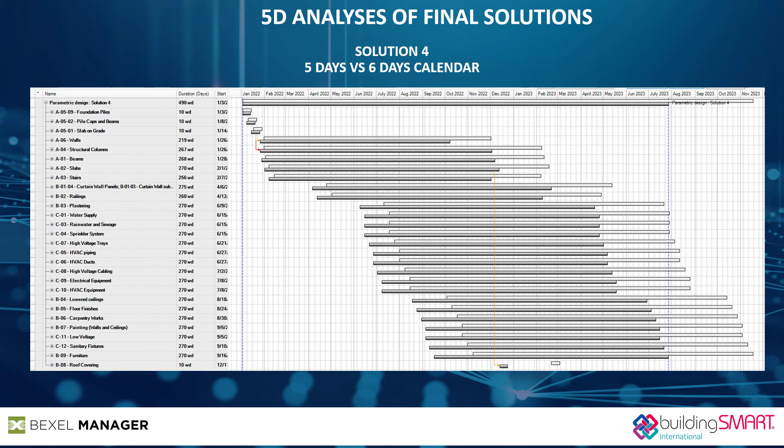Important thing is that all created or imported project information is saved within the platform and can be exported into multiple formats for analysis. One of the very interesting ones is the integration and ability to export all data into Power BI and create interactive and publicly available reports.

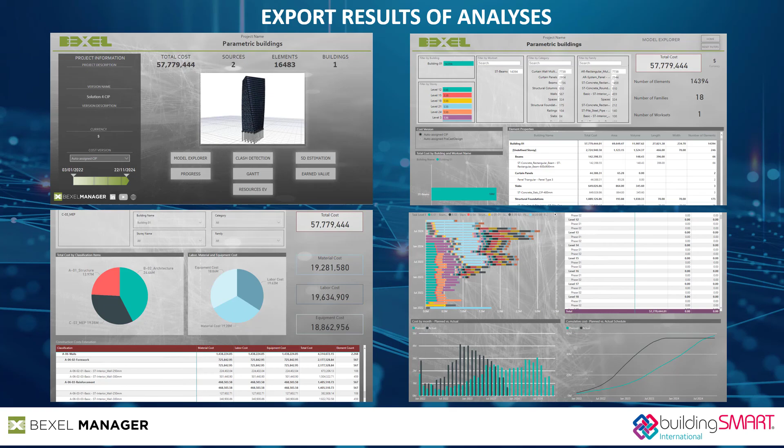The look and level of detail presented in these reports can be fully customizable, and templates are open to adjustments. In this presented workflow, I tried to explain so everyone can understand the steps for setting up the system and creating auto-generated schedules and 5D analysis to efficiently find the best design solution.

The next level of this workflow is using the BEXEL Manager command line application, which enables full automation of any time-consuming or repetitive process, so now there's no need for users to even open the BEXEL Manager platform itself.

Instead, we can schedule tasks and actions that we want to perform, and the system will execute all these actions according to a predefined plan. It's customizable and can perform multiple analyses on different groups of IFC files from different projects at the same time. It means you don't even need to open your projects anymore.

The system will do everything for you, and now, teaming generative design tools with integrated BIM management platforms such as BEXEL Manager, we're really reaching the next level of automation in the construction industry, leaving design and management teams enough time and freedom to be creative, to be more satisfied, and to be more productive in their everyday work.